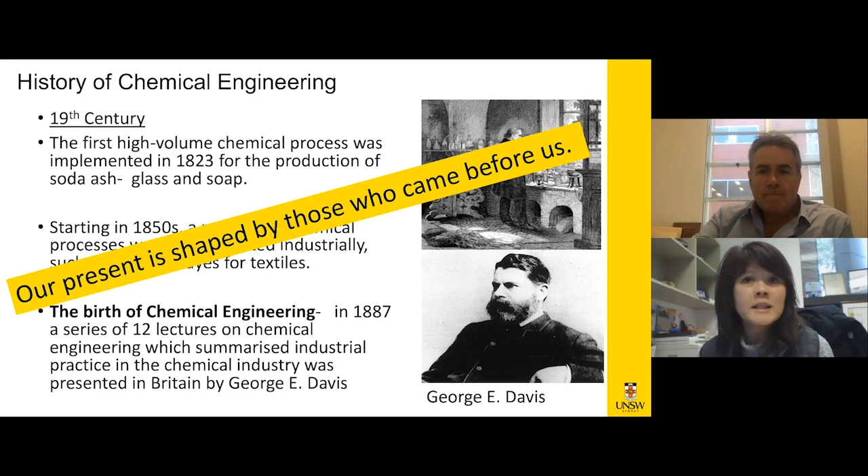I just want to stress again that we can learn a lot from our past. Our present is shaped by those who came before us, and our future is also shaped by what we learn from the past and the present times as well.

As chemical engineers or chemical engineering students, I'm sure you've heard of the Haber-Bosch process. If you haven't, make sure you go and check it, because you will not be able to graduate chemical engineering before knowing the Haber-Bosch process. This is probably the most significant breakthrough in chemical engineering, a process that changed the life of everybody in the world.

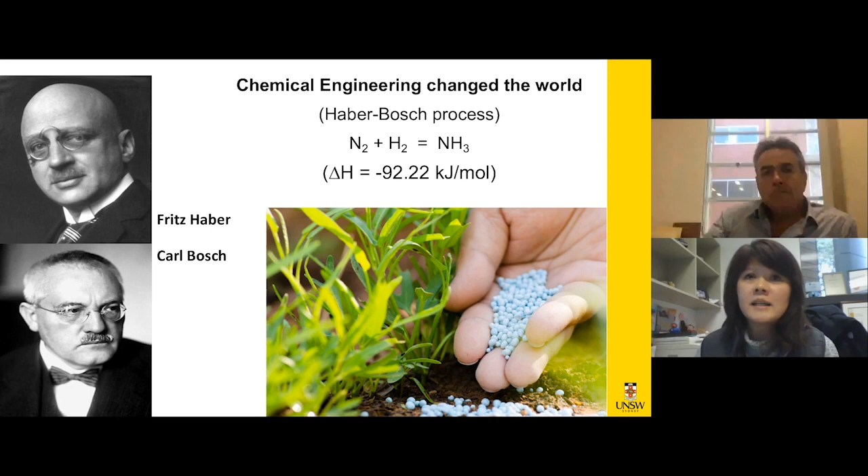It's a process that requires a lot of energy, but it's also a process that sustains life on our planet. That's the reason we have 7.8 billion people now in 2020. The Haber-Bosch process was actually developed back in 1900, when we only had 1.6 billion people, and the population has grown thanks to the ammonia produced from the Haber-Bosch process.

So today, when I'm talking about energy, I think it's important to reflect on this process. The reason is that this particular process requires a lot of energy, and therefore, as chemical engineers, we need to rethink how to develop more sustainable processes, to make sure we have a way of life and processes that are sustainable, so we can build a better future.

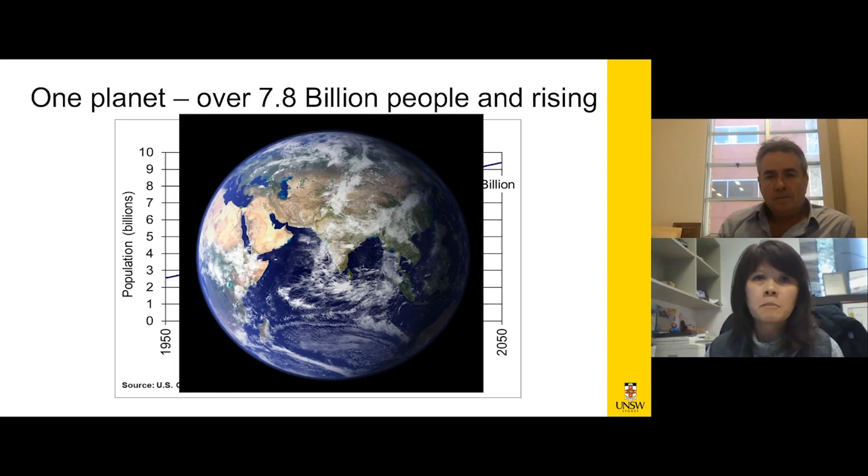Today my talk, as Tom and Olivia already mentioned, is about Power to X, or another way I can call it is harnessing solar energy for chemical processes. Since the beginning of my research career, I've always been passionate about research for sustainability. When I started, I was looking at how to develop chemical processes that can solve our environmental problems, which is why I was working on water purification. Then the science and principle can also be used for energy applications - that's how I started my work in energy.

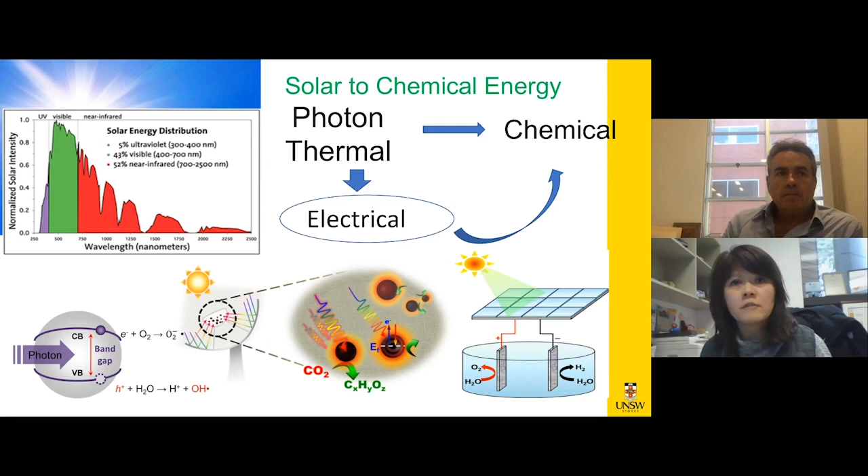harnessing the light straight away, which is known as photocatalysis. We use a catalyst to harness that light, or we can use a catalyst to harness the heat of the sun and use that heat to drive chemical reactions. Or as we can see from this diagram, we can harness the light, convert it to electricity, and then use a catalyst again to drive the chemical reactions.

In my research, I'm actually looking into designing catalyst materials. Unfortunately the animation doesn't work, but what I'm trying to explain is that there are a lot of ways - and again, chemical engineering skills are very important here. There are many ways to make catalysts, and one way is flame synthesis, where I can use the flame as the reactor to make the particles. The design of the catalyst is very important, because it's one of the keys to effectively harnessing the sun's energy and converting it to chemical energy.

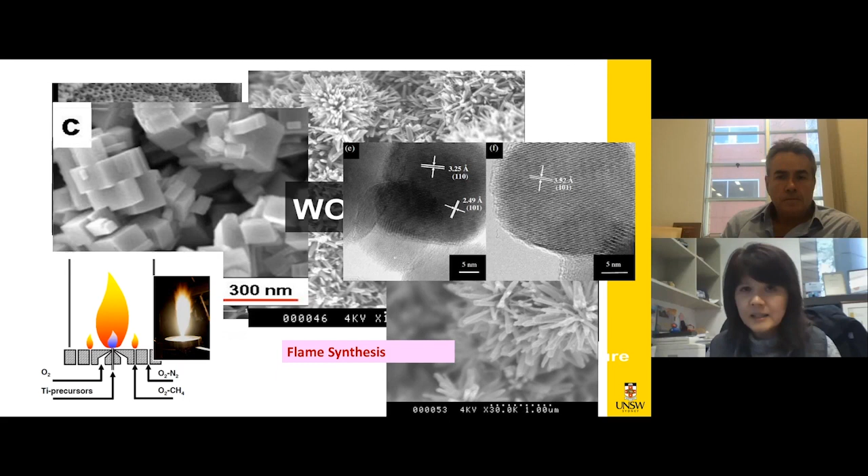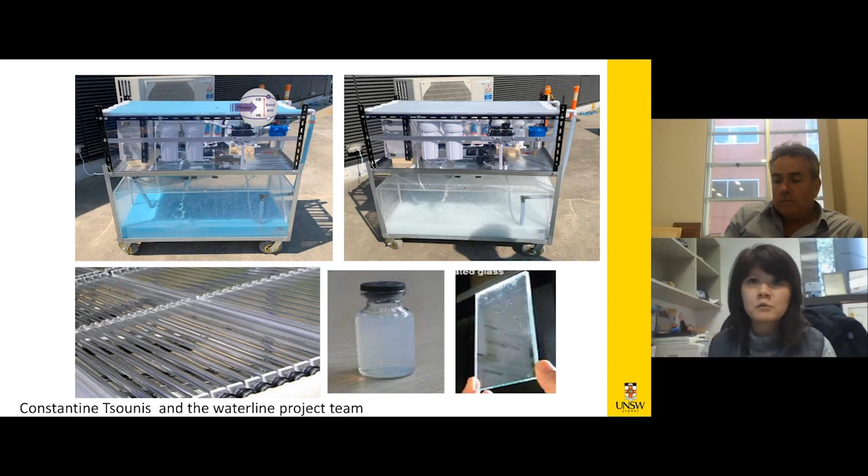As chemical engineers, our work is not just designing the catalyst, but we also have the skill to design reactors and build the reactor system as well. This is very important because it differentiates us from chemists or material scientists - our capability to design reactor systems in order to really drive the reactions effectively.

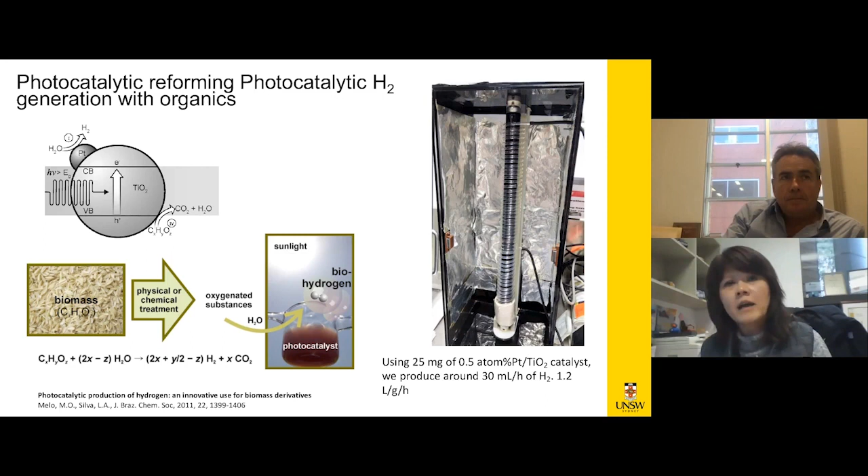Other ways of harnessing solar energy to convert it to chemical energy, for example to make hydrogen, is by converting biomass and waste materials to extract hydrogen from it. We can use sunlight directly with a catalyst to extract hydrogen from the biomass, or use sunlight to generate electricity, and use that electricity with a catalyst to convert the biomass to hydrogen. So we're using abundant solar or renewable energy, and then using chemical engineering processes and designing catalysts to extract the hydrogen.

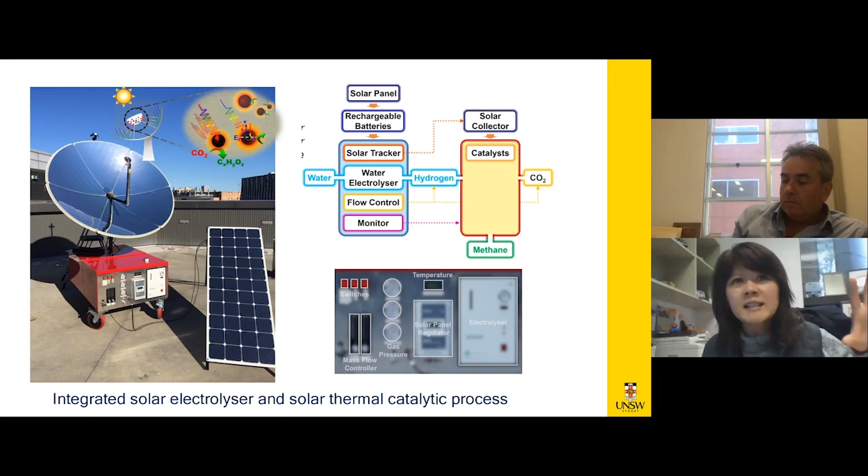So the main ingredients are water, carbon dioxide, which is a waste we want to get rid of, and energy from the sun only, and that can be used to produce methane. Methane is a chemical building block for a lot of chemical industry, and it's also a gas very important for energy purposes. So that's one of our power to X examples, harnessing the heat and light of the sun to drive the reactions.

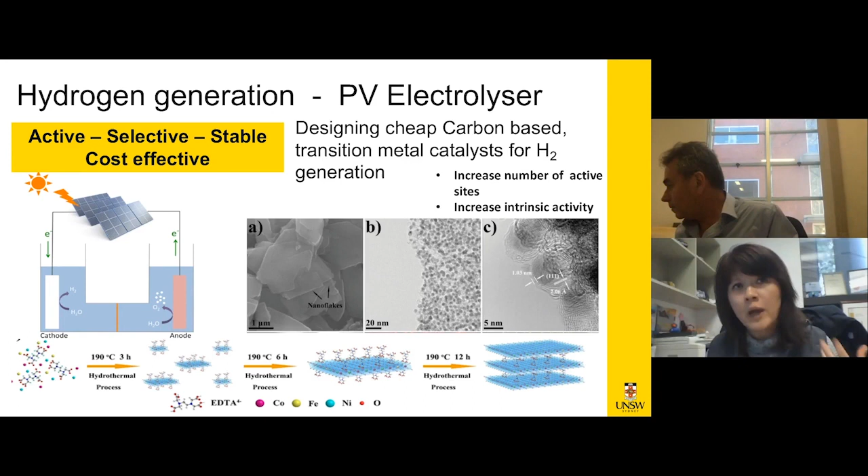Another project we have looks at harnessing solar energy to convert to electricity, and then driving the catalyst process to produce hydrogen. A lot of our work here focuses on making hydrogen in this case, and a lot of the process focuses on making active, selective, and stable catalysts. These are the key things important in chemical industries: being cost effective, and stable and selective for the chemical reactions we want.

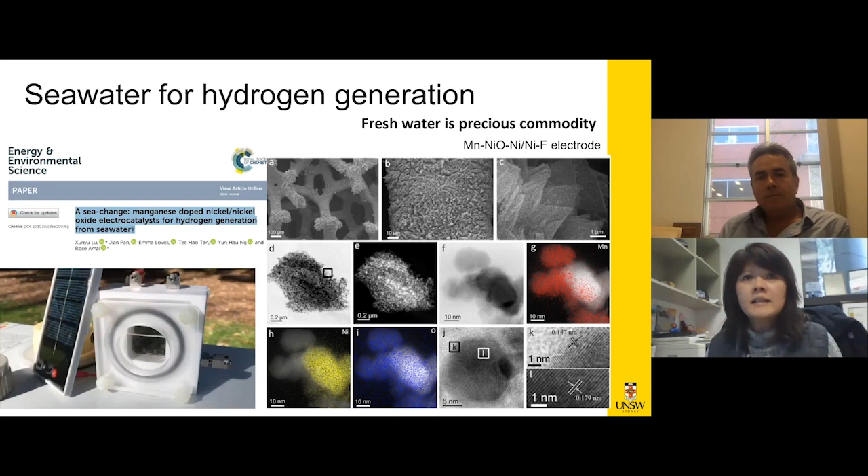When we talk about processes, we also have to think about sustainability. In most cases fresh water, especially in New South Wales, is a precious commodity. So when talking to industry, one question is: you want to use water as your raw material, but do you have the water? That's one of the problems. But we have plenty of seawater, especially since Sydney is a coastal area, so we're also looking at how to convert and use seawater as our source for making hydrogen. Designing the catalyst system is very important here because seawater is much harsher than other water sources.

Talking about the work we're doing now, there are unit operations I mentioned that can be used to convert other small molecules. I mentioned water already, using electrolysis to produce hydrogen. But you can do the same thing with CO2 as a raw product. We have a process using an electrolyzer and our catalyst, driven by a solar panel, to convert CO2 to, for example, syngas, and also to formic acid.

This is very important because I think this is the future of chemical processes: converting small abundant molecules to chemical products rather than relying on fossil fuels. A lot of what we do currently in the chemical industry relies on fossil fuel, for example to make syngas via steam methane reforming to make hydrogen. But we can look at other abundant things, like the carbon dioxide that comes out from the chemical industry, and by doing that we can actually close the carbon loop.

So I think it's important for us to really look into what we can do in the future and utilize our renewable power.

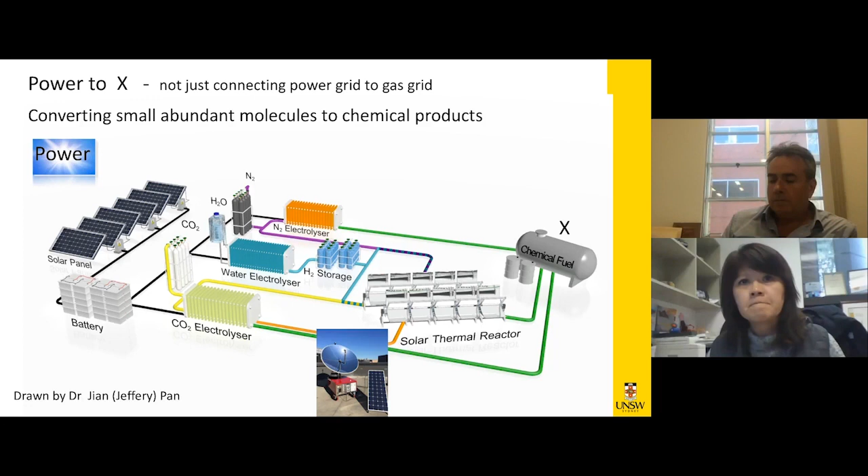At the beginning of my talk, I mentioned the Haber-Bosch process, ammonia synthesis. This process has been around for more than 100 years - it's yesterday's technology but still used today. The way they get ammonia is by getting hydrogen from methane via steam methane reforming, and that methane is coming from fossil fuel. The nitrogen comes from the air, so that's fine.

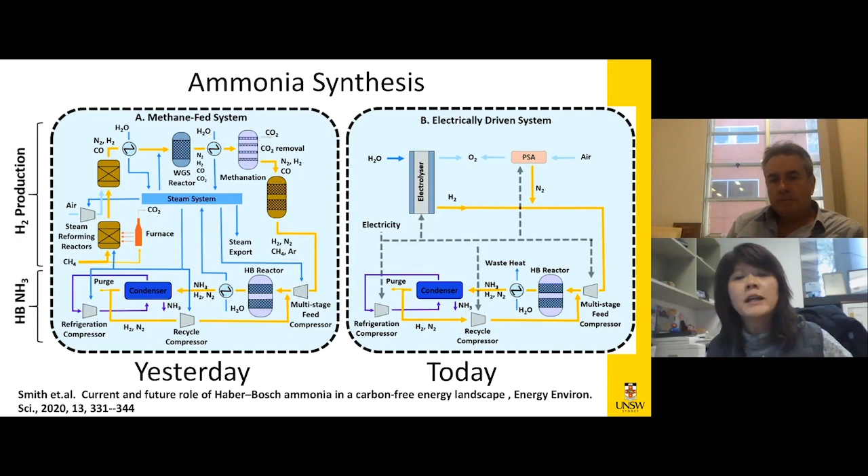Today's technology, which a lot of industry has started to look into, is instead of using methane to extract hydrogen, they're using an electrolyzer to get the hydrogen. That hydrogen then reacts in a similar process to Haber-Bosch to produce ammonia. So instead of using fossil fuel, we can now use clean, green hydrogen to make ammonia.

What I see for the future, the tomorrow way of making ammonia to sustain life, is that we can also use nitrogen, but instead of having to use high pressure, 200 atmospheres, and high temperature, 450 degrees Celsius, we should be able to use an electrolyzer and renewable power, operating at low temperature and low pressure, to convert nitrogen and water using a catalyst in electrolysis to produce ammonia.

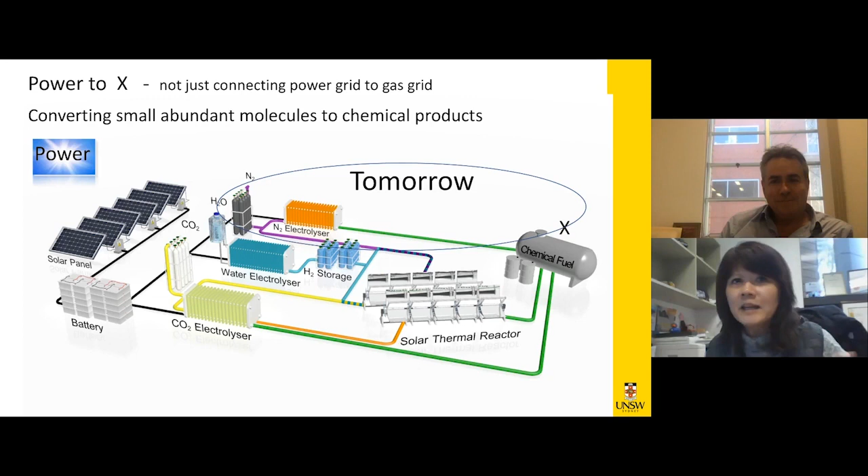This is something I foresee, perhaps not immediately tomorrow, but in maybe 20 years' time or so, and something that the chemical engineering students here will probably be the ones who develop further. With that, I'd like to thank you, and also thank my members, including Con, who is part of this group.

For me, I consider myself sometimes the past already, and I think my group members are the present, and you all, the audience, are the future of chemical engineers. I believe that the future is bright.

And with that, I'll end my presentation, and thank you.

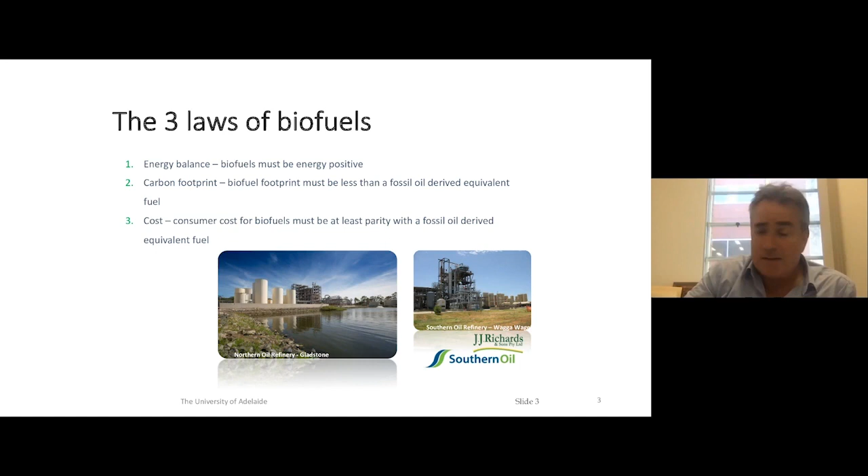And basically, it's got to make money. A company is not going to use or produce biofuels unless they can make a profit. This is the big challenge.

So what's a good feedstock? We've been looking at hydrothermal liquefaction, which is a high temperature pressure reaction that we put organic material through, to a high temperature of 350 degrees Celsius and a pressure of around 200 bar. So we take the wet biomass to just below the critical point of water. Through the heating curve to that point, we get depolymerization of the organic materials and they reform into a crude oil-like product. It's a very interesting process, very complicated, but it will turn wet organic material into a crude oil that can be further refined.

So I mentioned before that we were looking at microalgae as a feedstock for biofuels. It's too expensive to grow algae for fuel. But during that journey, I came across hydrothermal liquefaction, and we also came across biosolids.

So biosolids are dried municipal wastewater sludge. During a conventional wastewater treatment process, we grow bacteria to remove soluble organic carbon from the wastewater - we grow the bacteria in the water to clean the water, but we produce biomass. This is called sludge. And the sludge has to be removed from the wastewater treatment process, and it's a big waste problem for the industry.

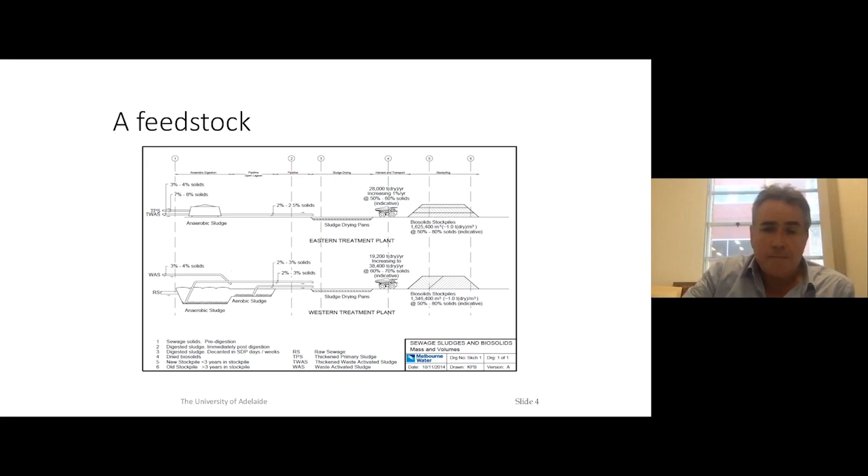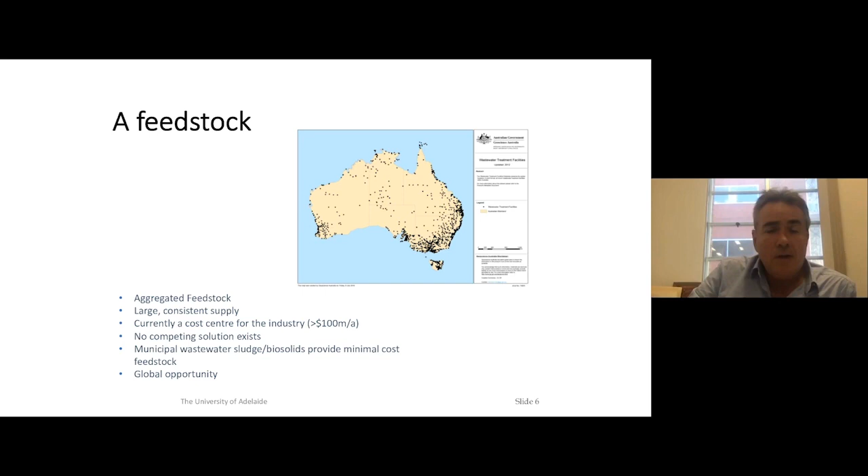If we look around Australia, biosolids are produced all around the country in different volumes. Economically, we need to be looking at the larger stockpiles to consider converting those wastes to a fuel to be viable. But globally, it's a massive opportunity and a massive problem. The industry spends around $100 million per annum just managing biosolids waste. So it's a great opportunity to come up with a new waste management tool, but also to convert this waste into something useful.

The challenge we've been undertaking for the last few years is trying to develop a technology based on hydrothermal liquefaction that is scalable and can take this feedstock and convert it into a renewable crude oil in a continuous process. We've worked at different scales from bench to pilot to commercial demonstration, and the economics so far would require a tipping fee of around $160 per dry tonne of biosolid waste.

I showed you a picture where the material is produced around 2 to 5% solids, so you can imagine to get a tonne is going to take a lot of litres of the sludge waste, to get that tonne of biomass that would require only $160 to dispose of. So it doesn't sound like much, $160 a dry tonne, but it is a lot of money for the industry. If we were to just convert this biomass into oil, the economics probably wouldn't stack up. So we need to look at valorizing all of the product streams, and I'll talk a bit more about that.

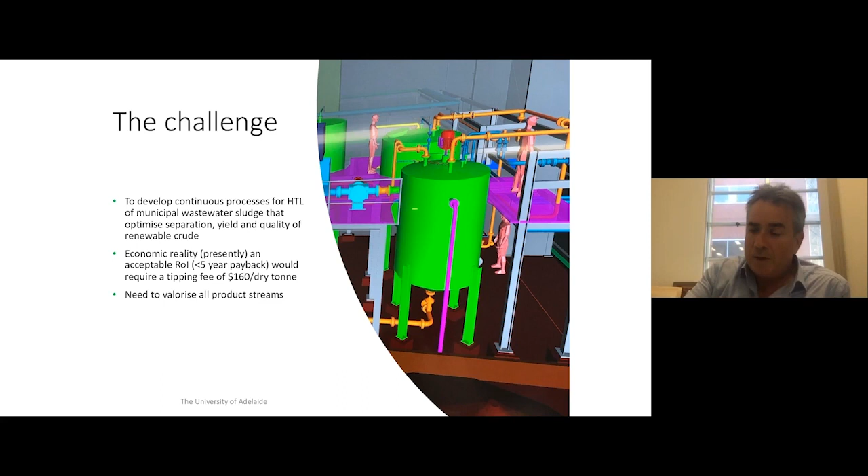Another economic reality is businesses are interested in this technology, but businesses nowadays would like a return on investment in a period of 5 years or less. That's a big challenge. Investors want their money back as quickly as possible and are not interested in long-term investment where the payback is greater than 5 years. So that's quite challenging.

So in this continuous hydrothermal liquefaction, you can convert the organic materials into a crude oil. But one of the challenges of putting these types of waste through hydrothermal liquefaction is that it's not just organic material, it's all the inorganics, it's all the heavy metals. So you've got quite a contaminated aqueous phase post-HTL that needs to be managed, and you have to separate the crude oil from that aqueous phase, which also is not trivial. But once you've separated the oil component, that can be readily refined in the standard refinery processes.

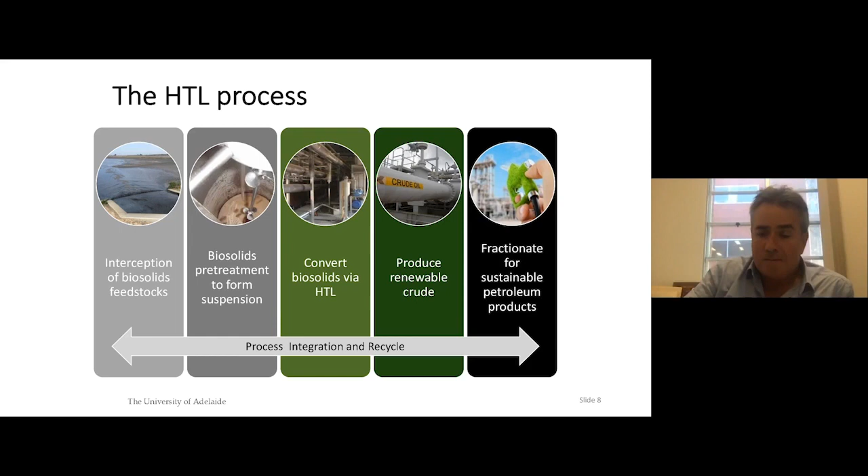So we're currently funded by ARENA to build and operate this demonstration plant. Our industry partner is Southern Oil Refining. This company is based in Wagga, and they have an oil refinery in Gladstone, Queensland.

Their business was built on waste to value. Most of their business is recovering dirty lubrication oils, removing the contaminants, and reselling the lubrication oil back to the market. Lubrication oils don't lose their lubricity when they're used, they just become contaminated. You can imagine in Australia, we use a lot of lubrication oil in the mining sector and the heavy transportation sector. So Southern Oil is about a $100 million business, and they are quite successful at recycling waste oils.

One of their wastes is dirty fuel. So they got interested in renewable fuels to add value to their dirty fuel that they recover from lubrication oils. I've been working with Southern Oil for a few years now, developing the hydrothermal liquefaction technology for managing the biosolid waste streams.

One of the challenges about developing new technology is what we call the valley of death. At universities, we have a great time, we get research grants, we can do wonderful things, but we work at early development stages. We call it technology readiness levels, a term that we've plagiarized from NASA.

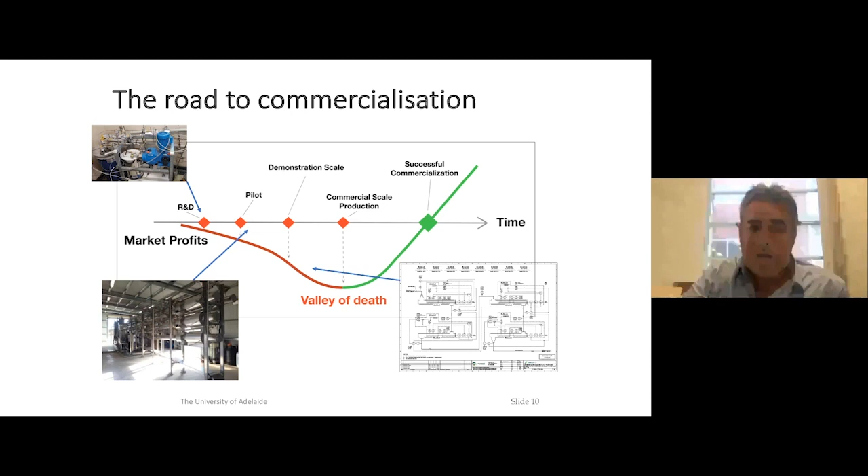Fortunately, in Australia, we have ARENA who fund projects in the valley of death. The government realizes that getting private investment to develop new technologies is very difficult in Australia. So they've created ARENA many years ago that will fund renewable energy projects through that valley of death.

So where we're at with our technology, as I mentioned, we've scaled it up to demonstration scale. The picture here is biosolids produced at Luggage Point in Brisbane. These biosolids have been centrifuged with a polymer, and what you see there is about 20% solids, so still 80% water, but it has a rubber consistency.

Urban Utilities have produced this particular waste. They send that to landfill. So every day, B-double trucks are filling up with this waste, going off to a landfill to dispose of it. I believe they pay about $130 a wet ton. So they're very concerned about us needing $160 a dry ton to make hydrothermal liquefaction viable to manage their waste.

And this is why we have to look at other products in addition to a renewable fuel. So we're looking at these different biosolids wastes. We're looking at how do we integrate hydrothermal liquefaction technology into a standard wastewater treatment plant. We're looking at the effect of the polymers that the industry uses and how that affects the oil quality.

As I've mentioned, in the 20% solids, you've got 80% water. We don't want the water. So what do you do with this aqueous phase once you've produced your crude oil? And I should mention about 50% of the organic fraction will convert to a crude. So you can imagine there's a lot of other products that we need to valorize. One of the issues is the aqueous phase because there's so much contaminated water coming out of HTL. And then we have to really look at these co-products.

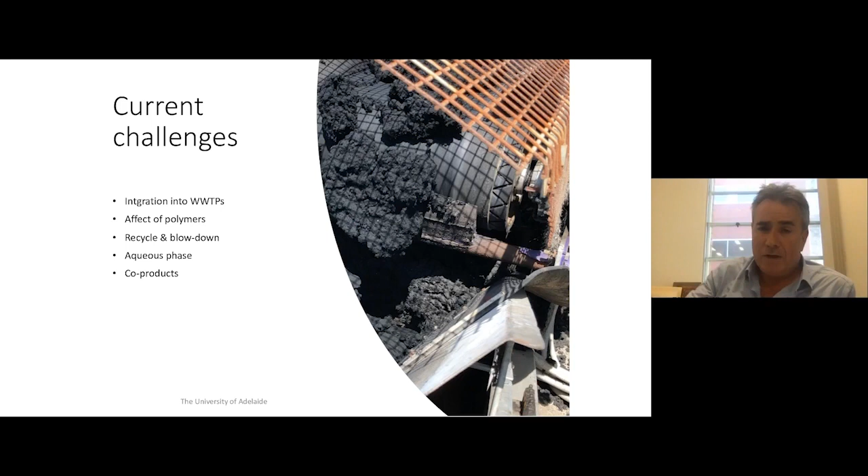So I've got about 8 PhD students currently working on different areas of research around HTL. We're now very much interested in catalysts that we can add to the HTL reactor to improve the quality of the oil, to remove heteroatoms such as nitrogen and sulfur, reduce the acidity, etc. So there's still a lot of R&D to be completed with HTL in parallel to scaling up the technology.

So I'd like to conclude my talk. I'm sure Rose said this too, that the young chemical engineers, which is you, will change the future. We need you to design and operate sustainable processes. As you know, it's getting harder and harder to get career jobs nowadays, so really, as young engineers, you need to create your own jobs, create your own companies. The solution is that we can produce cheap, clean, renewable energy. This will drive the future economies of the world, and I think that is your challenge. So that concludes my talk. Thank you for listening.

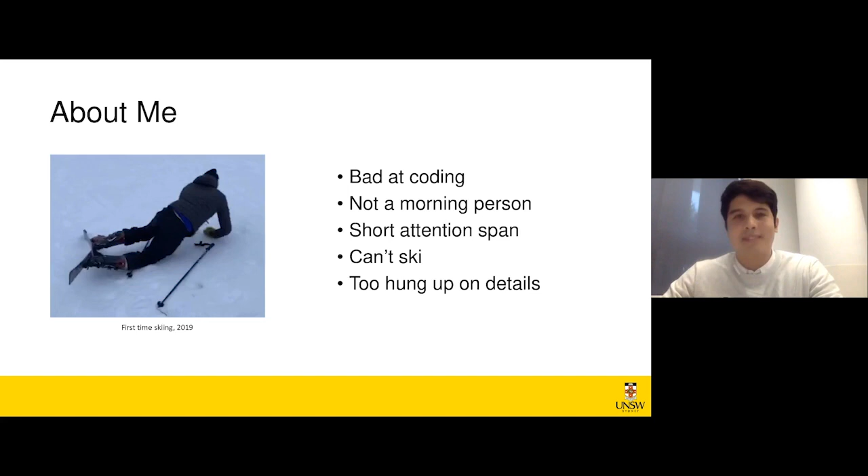The mantra goes 'fake it till you make it.' I used to believe that was something you needed to do to fit in. But as I've grown personally and professionally, I realized that just being yourself is key, and being able to laugh at yourself is really important. So if you ever feel out of place, don't - everyone's really on the same boat as you.

And so I want to talk a little bit about Power-to-X, and Rose introduced this really well earlier, so I won't add too much detail to that here, but this is sort of what chemical engineers' fantasy is in terms of how we can integrate renewable energy generation into viable chemical processes.

Right now, Australia is one of the world leaders in terms of solar cell development. We can make really, really efficient, cheap solar cells that produce really cheap electrons, and you can get these electrons for less than 3 cents per kilowatt hour nowadays. And so if we want to really integrate renewable energy into industry, we need to make sure that we have the processes that are available for that.

Not everything can be electrified, right? So for example, we can take those electrons from the renewable energy generation. We can pass them through a water electrolyzer to produce hydrogen. We can pass them through a nitrogen electrolyzer to produce ammonia or fertilizer, as Rose talked about before. Or we can even use waste CO2, and with those electrons, create things like methane, methanol, formic acid.

And all of these things are really important energy carriers and fuels and chemical feedstocks that we can use in industry. So by using this sort of P2X pathway, we're really coupling the end need, which is sort of, for example, a chemical feedstock, which can be used to synthesize other chemicals, or it can be used as a fuel directly. And we're coupling that with the really cheap electrons that we can get from the renewable energy side of things.

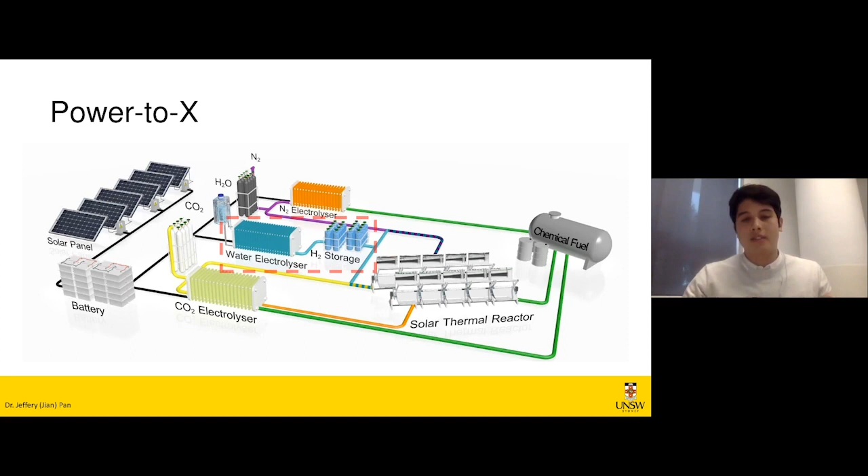So for that, we really need to maximize the use cases of these end chemicals. And I'll be focusing a little bit on hydrogen here. I find hydrogen really interesting because it's sort of the cornerstone of the whole P2X concept, where hydrogen can be used as a chemical feedstock to make other things like fertilizer, methanol, urea.

You can use it to heat things up directly for industrial processes or even domestic heating. And you can use it as a fuel as well. So it's a great replacement for diesel once we have the infrastructure up for it. And you can even use it, or they're trialing applications in aviation.

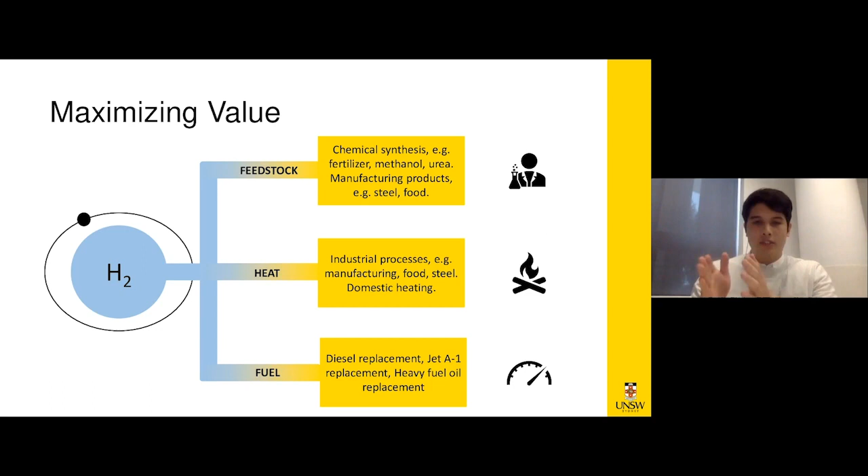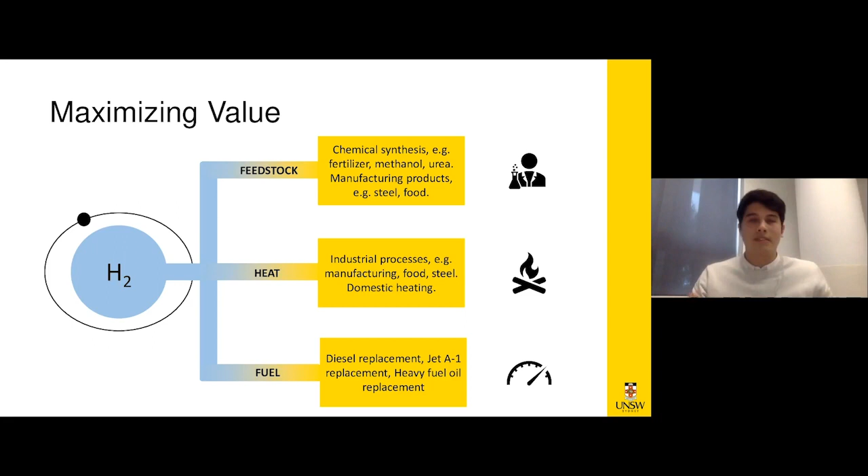And so what that really means is that the economics of that P2X pathway doesn't really fall down to just hydrogen as a commodity on the commodity market, because that would be worth very low amounts, but rather what hydrogen can be used for. So for example, if it's replacing diesel and it's cheaper than diesel, the cost is not so much how much you can sell hydrogen for, but it's how much money you save by using hydrogen as opposed to diesel, which is quite expensive, as Professor Lewis was talking about before.

So what you'll find is that there are two main factors that really define how much hydrogen is going to cost you to make. And that's firstly, the average price of electricity, which, as I mentioned, because we have so much solar capabilities and we really are driving the cost of electricity down, we'll leave that to the PV guys to sort out. But the other thing that we can sort of have control over to make this process cheaper is by reducing the amount of electricity required per kilogram of hydrogen. So at the moment, industrially, I think it's about 55 or 50 kilowatt hours required per kilogram of hydrogen.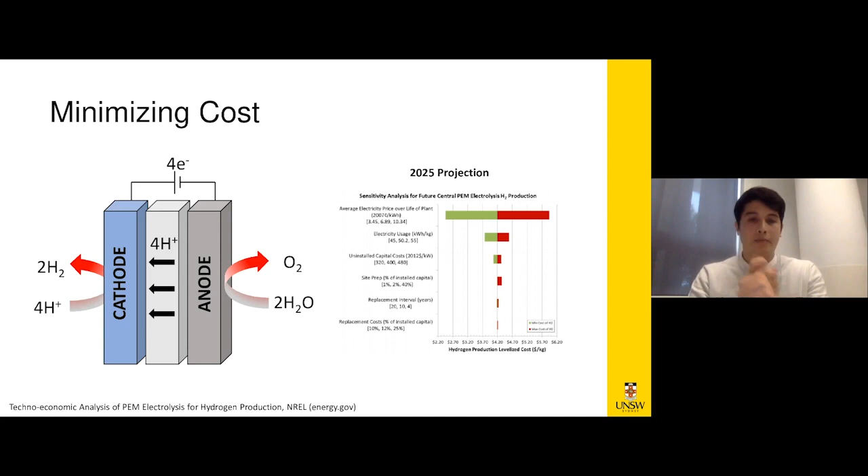But if we can drive that down even to 45 kilowatt hours per kilogram of hydrogen, we can really reduce the cost of hydrogen to about $2 per kilogram, which is what the National Hydrogen Strategy really wants us to aim towards. So in order for us to really realize P2X as a real possibility, we need to, A, make sure that we're using the right hydrogen in the right use cases and applications, and B, that we can minimize the cost of hydrogen production.

And this is where SwitcH2 comes in. I might add that during our final year design project, when I was an undergraduate chemical engineer, we were required to optimize both the carbon footprint and the cost of a very large brewery operation.

That inspired us to dig a little bit further and think about what the challenges a brewery actually faces are. And the first one is that they require so much energy, about 40 kilowatt hours just per 100 liters of beer, which is equivalent to about 75 kilograms of carbon dioxide released per hectoliter of beer.

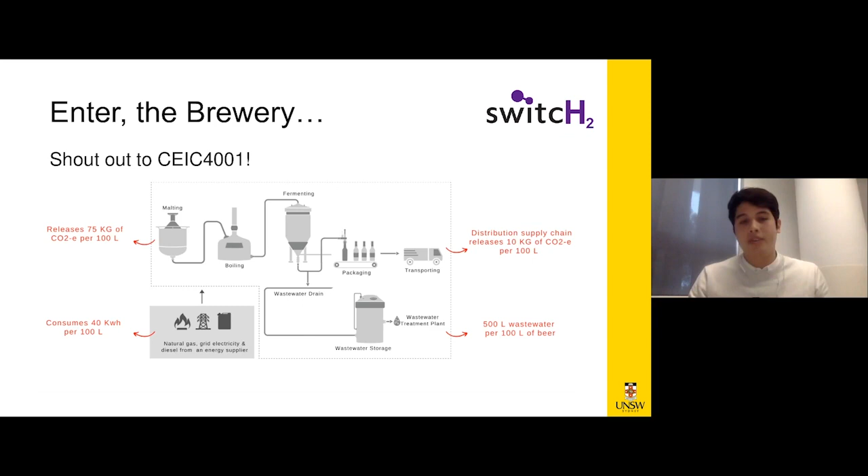And when you start thinking about the distribution chains of a brewery and also how much wastewater is produced, it's about 5 to 1 wastewater produced per liter of beer produced. And that's all really rich, organic, highly concentrated organic waste that has really high enthalpy behind it. You can start to see a problem there.

So the opportunity came for us when we realized that most of the energy demands for a brewery are actually satisfied currently by natural gas and LPGs. These are liquid and gas energy carriers. When the brewery operates at nighttime, when they don't have access to solar energy, whether on-site or bought directly from a solar farm, they revert back to grid energy.

And at the same time, they produce copious amounts of wastewater, again about 5 to 1. So if a brewery produces 1 million liters of beer, they have about 5 million liters of really, really organic, rich, high enthalpy wastewater that's not being used.

So when we started to think a little bit back towards how we can really optimize how hydrogen is used and what we can actually use to make hydrogen, the brewery really clicked for us, because the two things on the left are things that hydrogen can actively replace, while the thing on the right is what we can actually use to make hydrogen. And that's really where SwitcH2 came alive.

We designed a concept for a wastewater electrolyzer. So instead of splitting water, which is what traditional electrolyzers use, we designed specific catalysts in the Particles and Catalysis research group so that we can actually oxidize the organics in the wastewater of a brewery. What we're finding is that thermodynamically, it's actually much easier to split these organics up as opposed to splitting water. So by using wastewater as a feedstock for the electrolysis process to produce hydrogen, you can actually reduce the overall energy requirement by up to 30% compared to the state of the art.

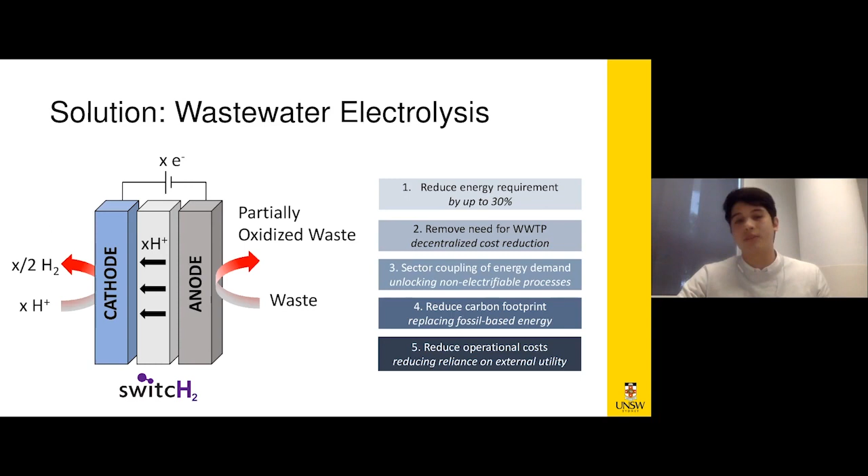And at the same time, because we're not relying on external forces and we don't need to buy those energy carriers, we can actually reduce the operating costs for breweries. The idea of SwitcH2 is to identify that specific use case of where hydrogen can be used, integrate that smoothly into the brewery—because systems integration is a big barrier towards hydrogen implementation—and reduce the cost of hydrogen production by developing and translating the catalysts we make in the lab for wastewater degradation into an actual application.

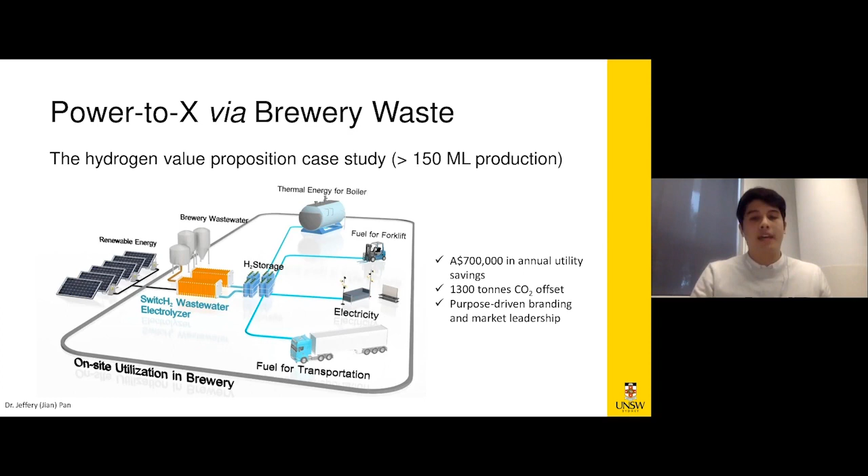We're currently working on a feasibility study with one of the larger breweries in Australia, one that produces more than 150 million litres of beer every year. You can really see substantial cost savings and CO2 offset, and at the same time they become market leaders in becoming a more sustainable FMCG, really appealing to purpose-driven customers.

In terms of where we've taken the startup, last year we came up with the idea, did some tests, and ran simulated brewery wastewater in the lab. We were lucky enough to win the Peter Farrell Cup from UNSW, and shortly after were funded by the StartMate Accelerator program, backed by the Atlassian Family Fund, to progress our technology further. We've since tried real brewery waste and scaled up about 200 times—now we can process about 20 kilograms of hydrogen per year in our system.

At the same time, we spent a lot of time making sure we had a really robust product-market fit, because at the end of the day, breweries aren't interested in hydrogen—they're interested in brewing beer. So we had to make sure we came up with modular, autonomous designs that fit in with the current brewing culture and practice in the industry.

We're currently working with some major breweries to look at a pilot scale implementation next year or the year after, depending on how nice or mean COVID is to us. That'll be producing about a ton of hydrogen per year. We're also lucky to have secured some university and government grants to fund our progress so far.

I want to acknowledge this all really came from our work in the Particles and Catalysis research group, where we were able to take ideas from the lab and be supported by Rose to push that out there and make solutions out of it. I also want to acknowledge my two other co-founders, Bajil and Kushal.

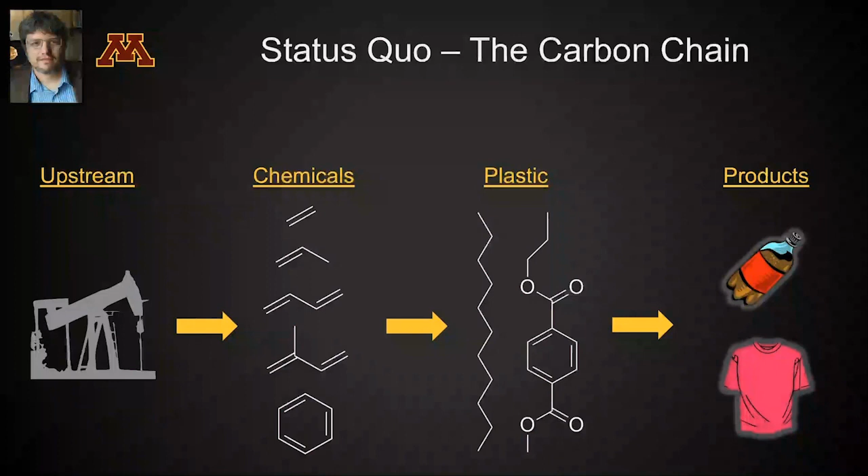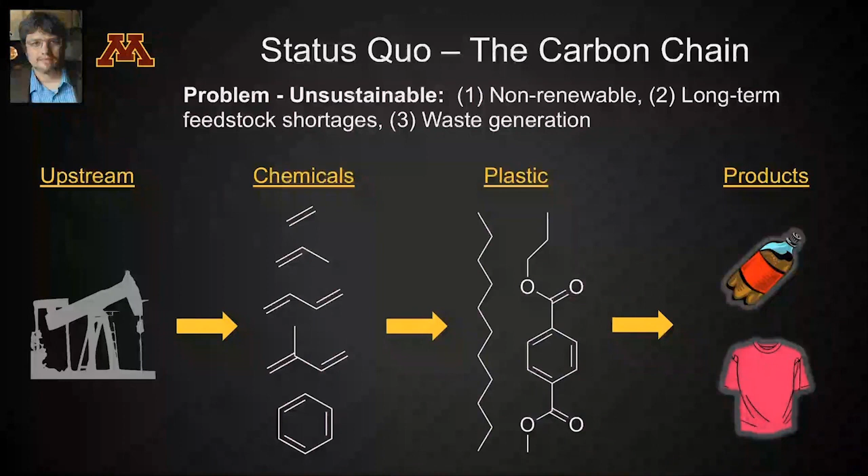If we think about the status quo for chemicals and materials in general, right now we take upstream fossil fuels and we make a slate of chemicals, including ethylene, propylene, benzene, butadiene. We turn those into plastics, and then those go into products. Of course, these products are life-changing and great for the economy, but the problem is their end of life. What do we do with them when they're done? And what do we do in terms of feedstock into the future? What we would like to do is find things that are more renewable, that won't have long-term feedstock shortages, and something we can reprocess and use again and again in a sustainable way.

Now, one approach to this is to take a completely different feedstock. We could take things like trees and grasses, non-food biomass, and from that make the same chemicals we already get from petroleum and natural gas, things like ethylene, propylene, and benzene. Then make the same plastics we already have, make those into the products we use right now, like bottles, shoes, shirts, cars, food packaging, all the things we do. But then also find a way to unmake them, so convert them back to their plastic polymer, or convert them back to the chemicals and use these in a closed loop. So once we've made it, we unmake it, and then we use it again and again and again in a sustainable carbon cycle.

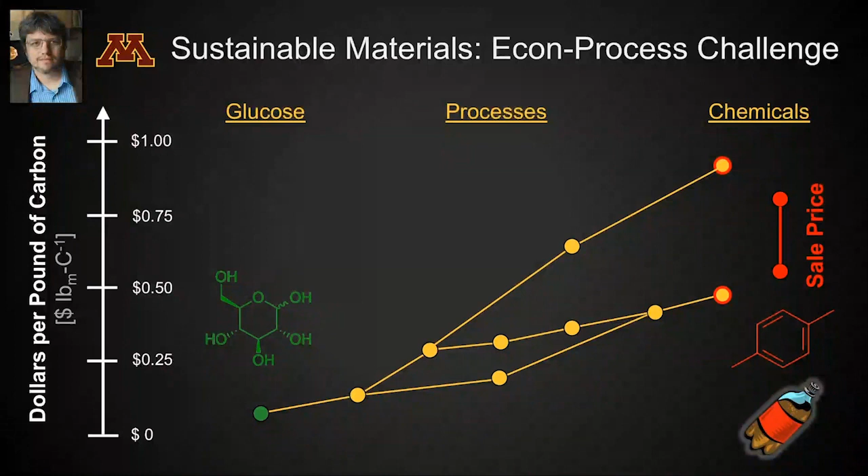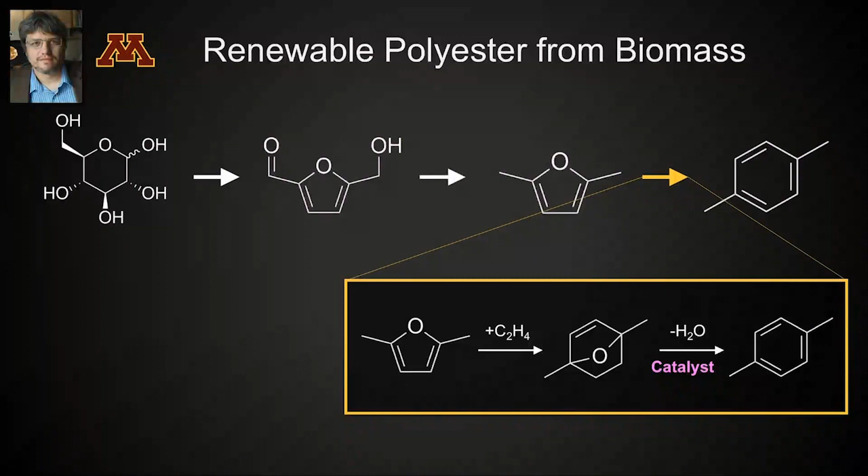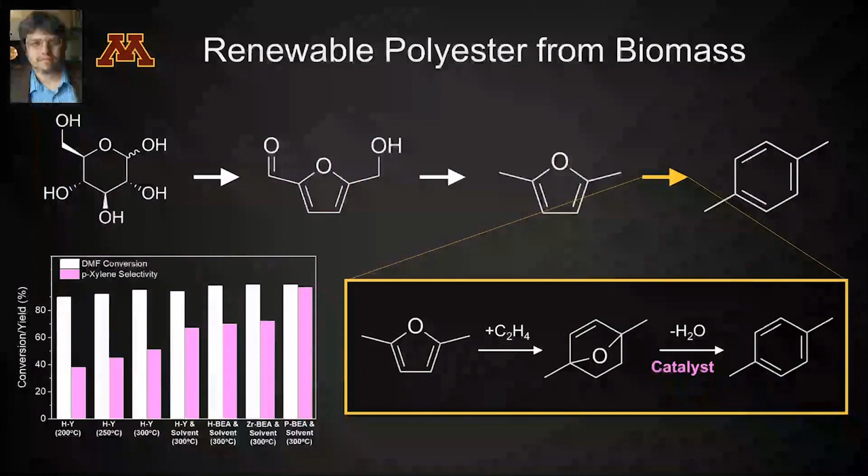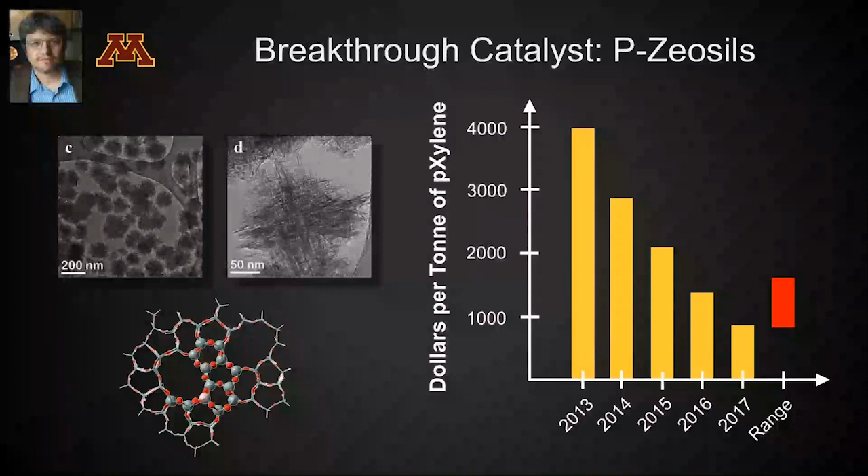Now, that's the technology we started with.

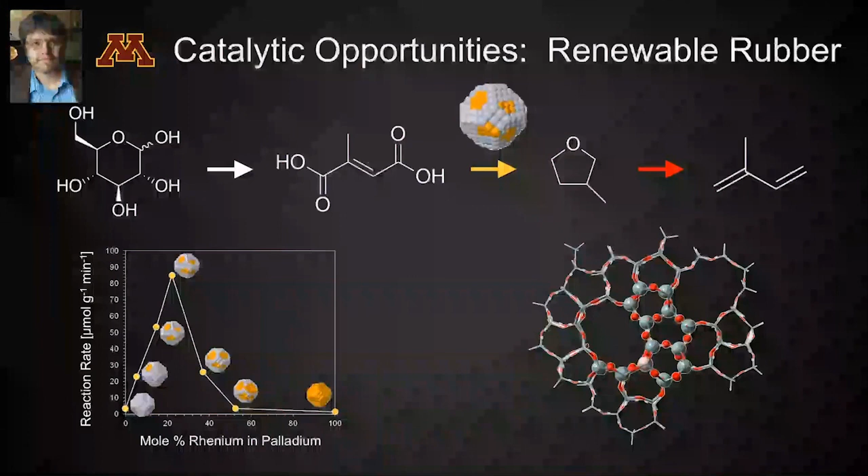We'll take that, use fermentation to make the second molecule you see from the left, diacid. We'll use metal catalysts to convert that to a 5-atom ring again. And then the final step, we'll dehydrate that and ring open it to make isoprene.

Now, we've developed that technology in terms of the chemistry, but then we also need to develop a process technology. So we'll take those reactions and convert them using a computer simulation, in this case, to design reactors and separators and process sequences. And then we'll optimize that to reduce the cost, both the capital cost to buy all the equipment and install it, but also to operate it.

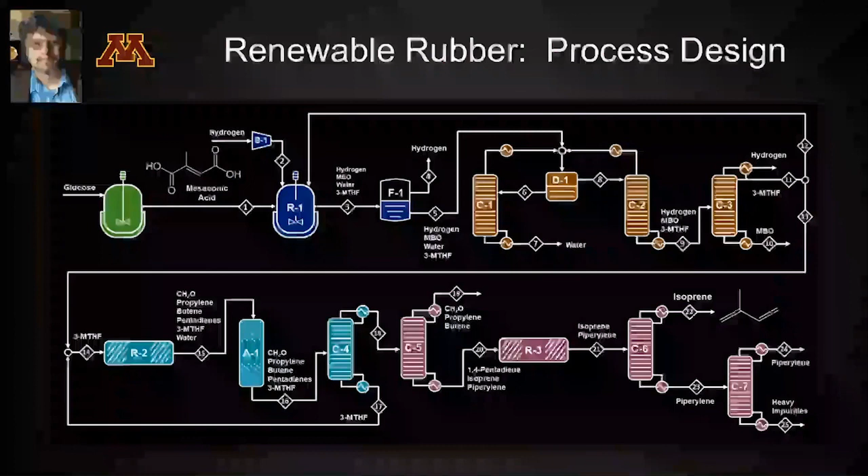You can see here all the different parts of the chemistry show up in different colors and contribute to the cost in different ways. Now, ultimately, we can take that design and say, what's the cost of everything, and how does that add up over time compared to conventional prices?

And isoprene is very interesting because it's one of the key components in renewable car tires. So we can make renewable isoprene from biomass, then we can make renewable car tires around the world and all sorts of other renewable rubber applications.

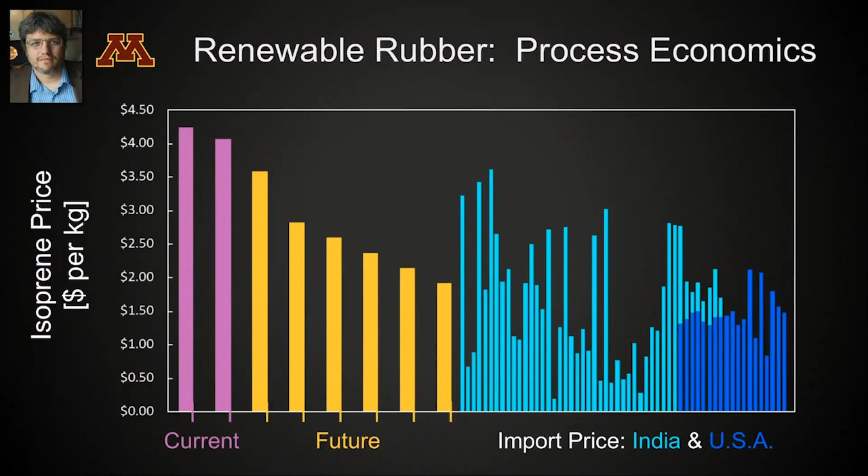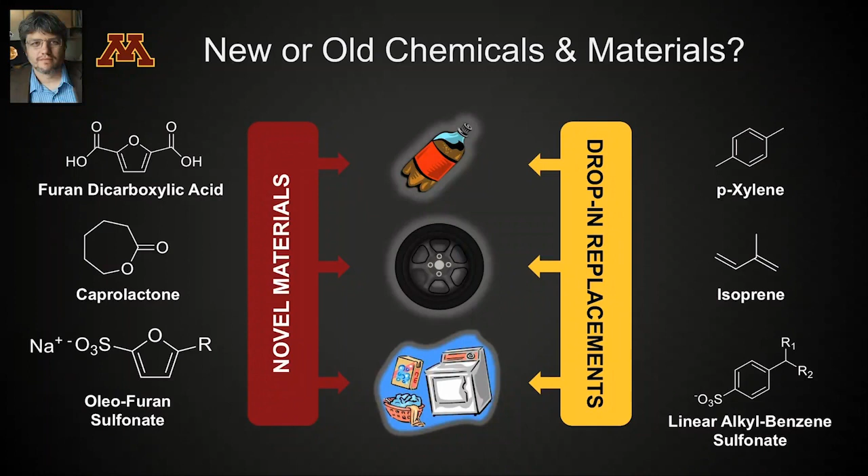It's a class of molecules we've invented that compete for cleaning laundry in a way that's much better than the conventional laundry detergents you can buy off the shelf. So let me give you an example here.

Here's a bottle of laundry detergent. And into that, you have all sorts of things. It's a formulated product, made of many different chemicals. Roughly a third of the bottle that you buy is water, so you're buying a lot of weight there in the water.

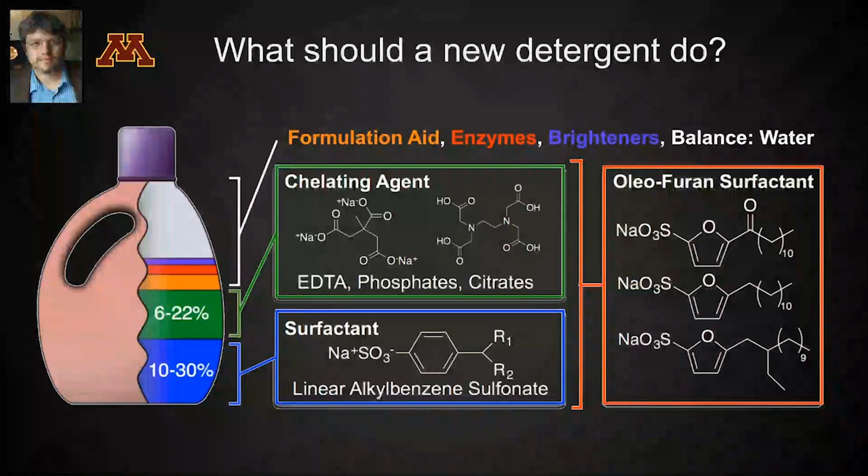Now, the problem with this molecule you see here in blue, the LAS, or linear alkyl benzene sulfonate, is that it's not stable in a lot of conditions. So we add in all sorts of other chemicals called chelating agents that grab all the metal ions and let the surfactant work. We're going to propose a new class of molecules here in red that do everything the blue and the green do, at lower concentrations and better performance, made from biomass.

So here's these molecules. They come in several tunable structures. The problem is that with conventional surfactants, they're not stable. So what you're seeing here on the right is the conventional surfactant, like you get in off-the-shelf laundry detergent, called LAS. And the new biomass-derived molecules are called OFS.

You can see here, I'm showing their stability based on their clarity. So on the right here, there's a vial, and behind that you can see our University of Minnesota logo. Now, as I add in more and more calcium, like you would have in hard water, the conventional LAS laundry detergent starts to get opaque.

You can't see through it because the surfactant forms a crystal, it stops working. But the oleofuran sulfonates stay crystal clear, even up to 10,000 ppm calcium. It's an enormously high amount of calcium.

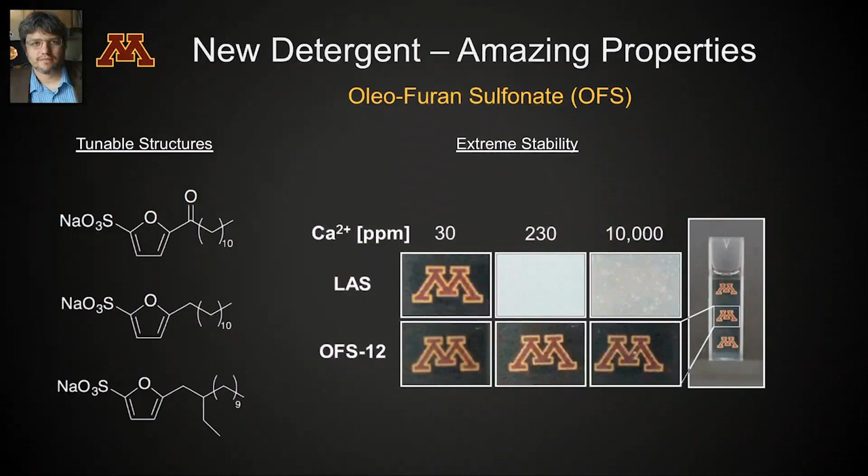Now, what you can do with these new molecules can't be done with conventional surfactants. You can make all these different types of products: paints, inks, coatings, detergents, personal care and cosmetics, agrochemicals, and use them for applications like oil recovery. Because they're so stable and effective as surfactants, you can make formulations that are cheaper, more sustainable, and used in new applications that you couldn't possibly before.

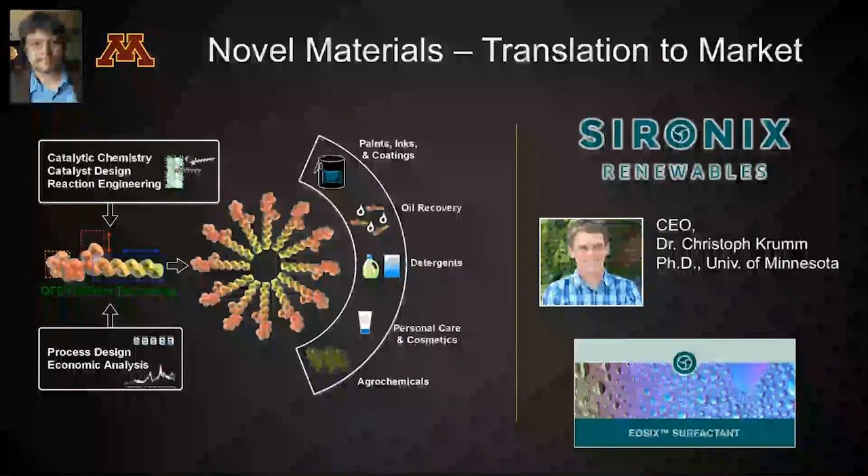Because this technology was so exciting, my student and I who helped invent this formed a startup company called Sironix Renewables. You can read about them online, and they market these bio-derived molecules as the EOSIX surfactant.

Ultimately, what's great about biomass chemicals is they have a bright, sustainable future that continues to grow every year. We already know that we have the ability to remake all the chemicals from the fossil fuel-derived industry in the next two decades. The chemistry is there. And what's happening now is the economics are getting better every year, to the point where we'll be able to compete without any subsidy with fossil fuel-derived chemicals.

We also know that new chemicals can outperform existing fossil fuel-derived chemicals. In this case, because I'm from the University of Minnesota, we study this because at Minnesota we have all sorts of forestry products and agricultural products that let us be a leader in sustainable materials. But places around the world can compete just as readily as Minnesota. There's nothing special about Minnesota — these technologies can be used on every continent around the world.

So let me just thank a few people. We do our work with the National Science Foundation for the Center for Sustainable Polymers, but also we have a Catalysis focus funded by the U.S. Department of Energy and our local farmers. Well, thank you for your time, and I appreciate you listening.